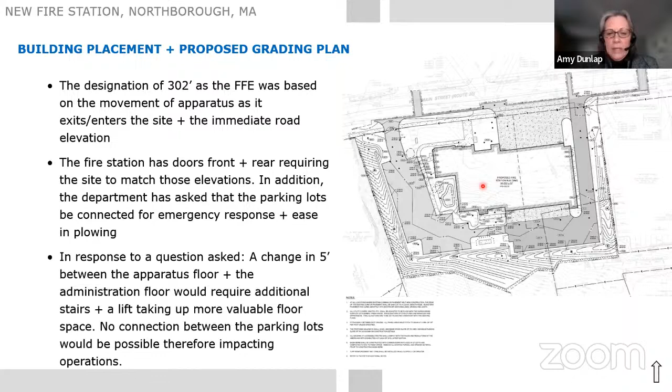In your packet that we've submitted, we have the proposed drainage plan. I'm not going to present that at this time—the civil engineers are on the call, and if you have questions, they can address that during the question and answer period. Similarly, we've got an updated utility plan in the package.

There was a question about what the bollards would look like around the transformer and the generator. These are dictated by the utility company. We have a typical bollard detail that we're showing here to address those questions, but the spacing, height, and size of them are all dictated by the utility companies.

We have an updated landscape plan. Ray Dunitz, our landscape architect, is on the call and can talk about this during the question and answer. We've got a plant list in the package. We have an additional bike rack added to the drawings, some benches as you enter the site off the street, and a site sign located on the site, which is an LED sign—I'll show details of that in a minute. You can also see all the plantings that have been developed around the site.

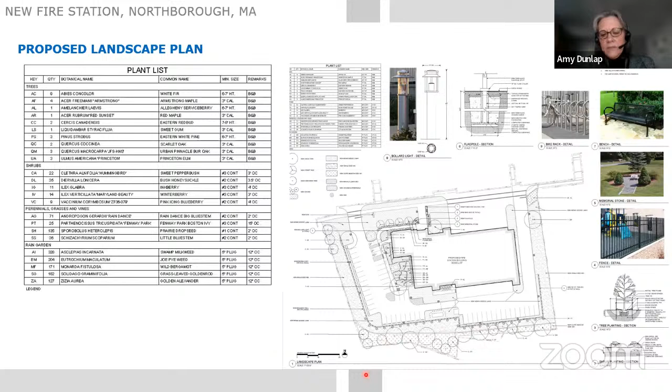In the package, you also see we have a photometric plan. The lighting for the site is a combination of pole lights around the parking areas and driveways. We have some wall sconces mounted on the building between the apparatus bay doors and at pedestrian entries into the building. We also have some bollards in the walkways entering the building.

We have bollards lighting the walkway into the building from the public parking area and from the street. The photometrics show that all the light is contained within the property line this time, and the light fixture cuts are shown on this drawing.

We selected a pole light fixture that was sympathetic with some of the fixtures featured in the design review guidelines, and similarly a wall sconce sympathetic with that pole fixture, as well as a bollard in the same style.

When we last met with you, there were some questions about the design of the retaining wall around the site and a request for us to look at alternate, creative solutions. We did do that—we presented five or six different options to the committee for what we could do with that retaining wall. We narrowed it down to a few options to continue our design work and get some pricing. The design in the original submittal was this straight wall.

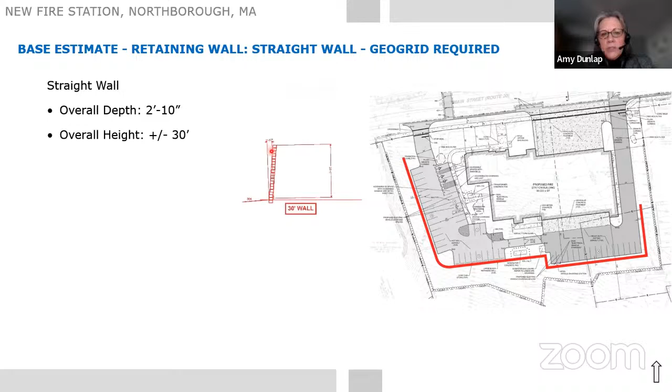We call it a straight wall, but in reality, each of the blocks is set back a little bit as it increases in height. So the overall height of the wall at the high point in this corner is about 30 feet, but the wall itself actually steps back about 2'10". You can see a section of the wall here as those blocks step back.

So one of the options we looked at was this combination of straight walls on the east and west, and then a batter wall in the south wall of the site. In that case, the batter wall, each of those blocks steps back a little bit further as it increases in height. So when you get to that 30-foot height difference in this corner of the building, the wall itself is about 17 foot 2.5 inches deep.

You can see that's this pink shaded area on the plans here. That's the wall as it steps back, so it takes up a little more area on the site itself.

We did cut some sections through to give you an idea of what that would look like. This top section here is taken through the public parking lot at the highest point of the site. So you can see the scale of that wall in comparison to a person and a car, but you also see that the wall steps back considerably as you get up to the top.

This section here is taken at the low point of the wall, so you see that the wall drops down considerably from one side of the site to the other. This section is taken right through the middle of the building. This section is taken across the building, looking back at the wall, and you can see the difference in height from the high point to the low point.

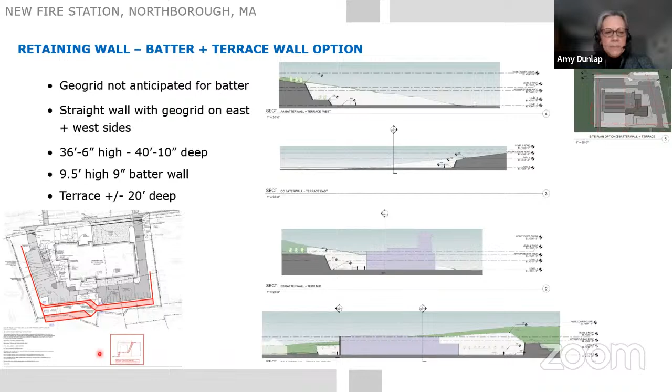And then we also looked at having 2 terraces moving back, again with straight walls on the east and west side, but 2 terraces. Because these terraces continue to step back on the site, this allowed us to create direct connections with the grade from the upper area.

So maintenance would be able to be performed from grade from the upper portion of the hill without having to access these terraces with the ladder. This scheme right here consists of 3 12-foot high terrace walls, and each terrace is about 18 feet deep.

So the overall height, when you get to this corner, you're getting back further into the site where the grades are increasing even more. So the overall height at this point is about 36 feet high, and the depth of the entire system is about 45 feet, 10 inches. So you're really getting farther and farther back into the site.

When you look at the sections here, you can see those planting beds and the relationship to a person and to a car. This is cutting through the building right here where the planting bed would be at its deepest. You can see that right there, and then what it looks like in elevation.

We did price out the straight wall option, the batter wall option, and the terrace wall option. After reviewing those costs with the committee, they decided to proceed with the straight wall option, as this option added substantial cost to the project.

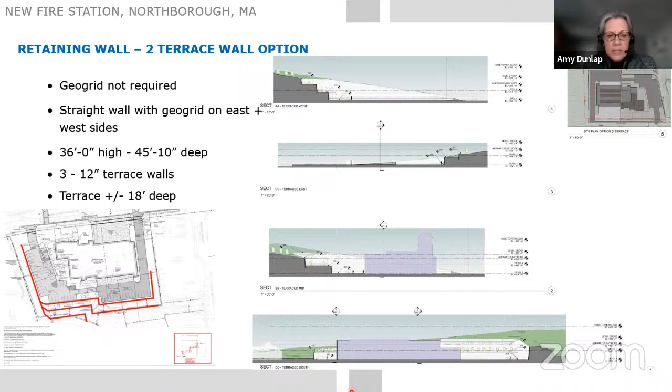There's a training and EOC room, which would also be made available to the public, and toilets located there. Those are the public zones of the building.

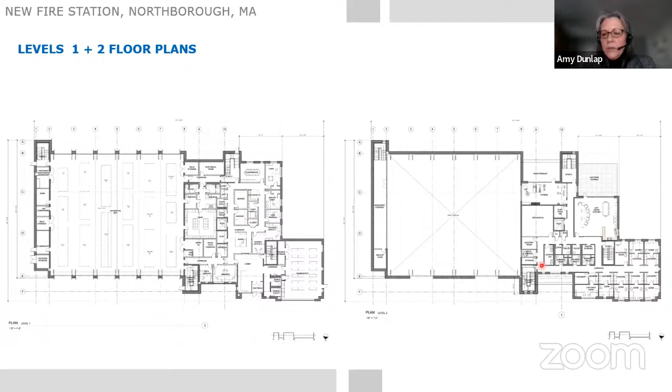Beyond there, there's the fire department administration spaces on the first floor, the fire department operation spaces, the apparatus bays, and all the apparatus support spaces located off of them. There's the hose and training tower located right here off of the apparatus bays. And then up on the upper floor are the living quarters for the fire department.

The rest of the facade has not changed much since we last saw you. We've been working with masonry reps to come up with some options for the masonry. We've had a number of meetings with them to look at different products, and we haven't found the right product just yet to present to the committee, but that is in process. We're hoping to wrap that up soon so that we can present material options to the building committee, and then bring their selections to you.

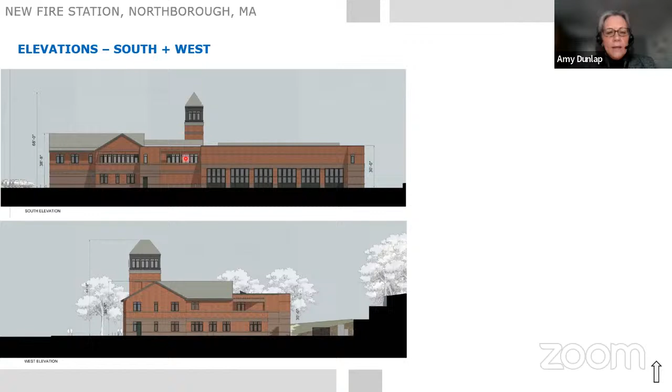When we last met with the design review committee, there was a comment about the roof decks off the day room and off the fitness room, and whether they would be really utilized by the fire department because of the southern exposure and they might be too sunny. We did take that into consideration, and we are showing some screening trellises or pergolas rather over the roof decks to provide some shade for the firefighters out on those decks.

These are the updated views from the street looking from the northwest and from the northeast. You can see that site sign that has been incorporated into the design, which I will show in just a moment. And then these are from the parking lot area, and you can see those pergolas over the roof decks.

We do need to get some zoning relief for a couple of things. The front yard setback is 20 feet required. Our forward-most wall plane is 39 feet, so we'll be looking for zoning relief for that. We're also going to be looking for some zoning relief for the signs, which are limited to 32 square feet.

We have this freestanding site sign, which will have an LED message board, as well as the address and Northborough Fire Department up above it. The sign support base was designed to be sympathetic to the building architecture. It's a masonry base, and we plan on incorporating some of the banding and alternate masonry materials that you see on the building. We have two piers on either side supporting the sign up above, and then a recessed base underneath that supporting the LED sign in between.

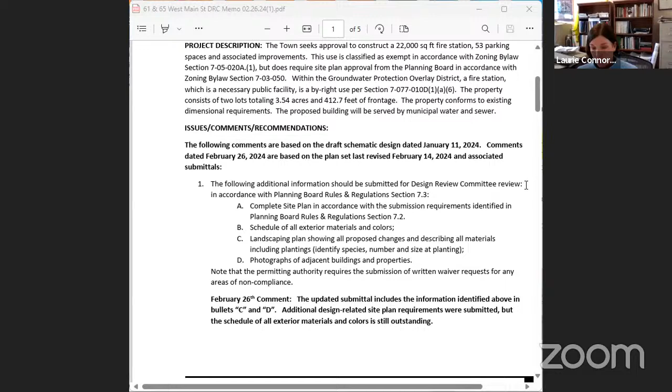Of course, the site plan that is submitted to the planning board needs to depict the underground utilities. So if you could add that. Let's see if there's anything else.

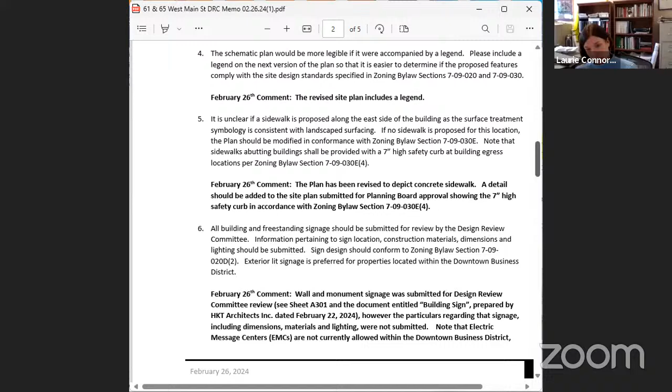What is your planned approach having to do with the street trees? Are you planning on asking for a waiver from the 17 street trees, or are you going to be able to accommodate some additional trees in your design? Ray, can you address that?

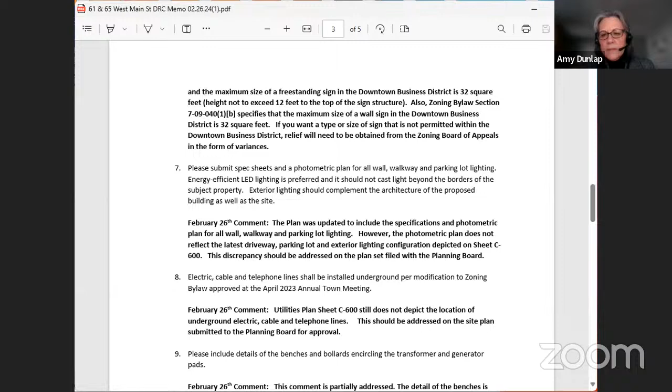I sort of can and sort of can't, because we need the sight lines for the trucks. We put in as many as we can to keep the sight lines clear, and also for cars entering the parking lot. If we can double them up, we'd have to work with HKT on how to approach adding additional trees without blocking views. Does that make sense?

As a compromise position, it did look to me like there were a couple of locations on the site itself, maybe behind the building, over by where the parking is, where you may be able to accommodate some additional trees. Yeah, we can add more trees. It's just the street tree definition. So in your waiver request letter, you could point out that in exchange for having fewer street trees than the requirements state, you are providing those trees in alternative locations. They might like that.

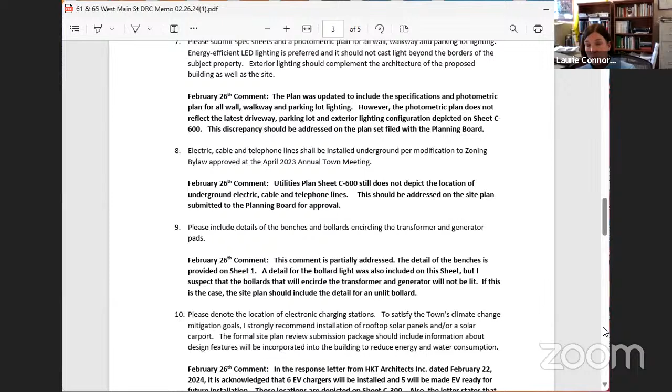Of course, adding the ADA compliant ramp. So it looks to me like you are going to be removing the existing sidewalk on Route 20, and shifting the location of the sidewalk and building new. Is that correct?

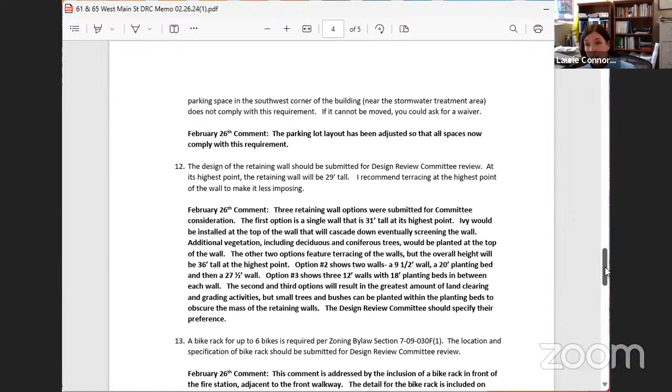Yes, that's correct. We wanted to provide that landscape buffer, the grassed area between the right of way and the walkway. That's great, because the sidewalk is broken in places, so I'm happy to see that you're doing that. Just make sure that you add the ADA compliant ramps and the detectable warning plates where your driveway locations are.

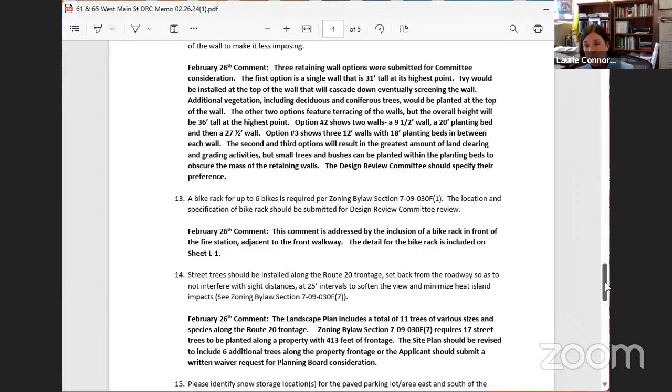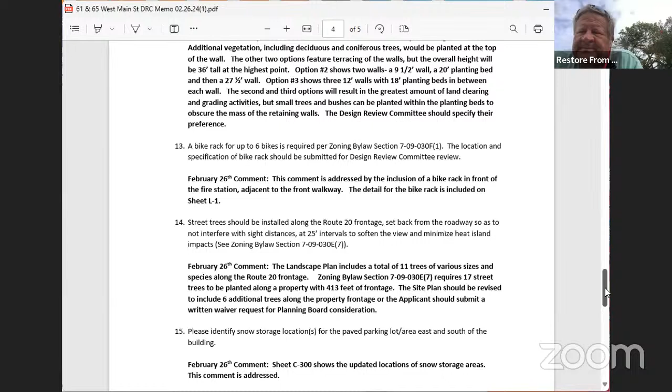If you're doing that, are they going to reconnect the sidewalks to the existing sidewalks, or are they going to be floating in the middle of nowhere? We'll be connecting them back in. That's how it's shown on our plans right now. I know that was one of your other comments, Laurie. We're showing connection to the Hillside Grill walkway now, and we will be connecting into the adjacent bank walkway as well.

Okay, that's great. Excuse me, can I stop a second on that? The adjacent Hillside Grill goes up and back, it's not along the street. Correct. So how will you connect to that?

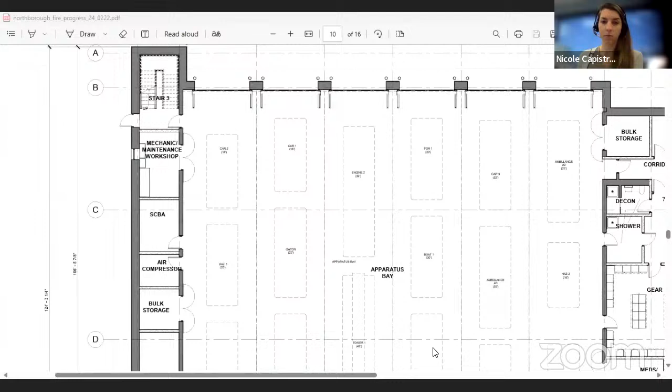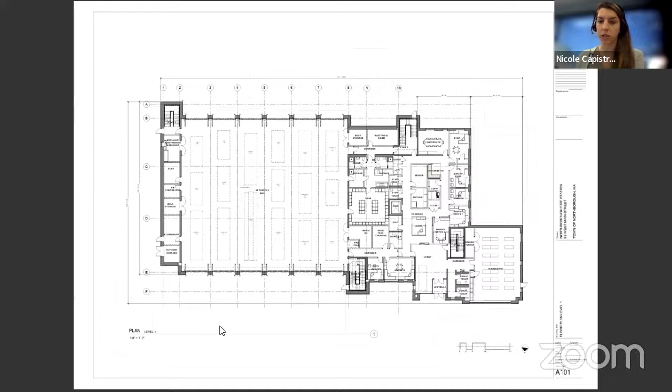So our walkway is also back away from the street to provide that landscape buffer. So we're pretty well aligned. We will need to adjust, it won't be a straight line connection from our sidewalk to their sidewalk. We'll connect in, we'll be able to grade to connect into their grade on their site. We've already reviewed that. Is that somewhere we can see?

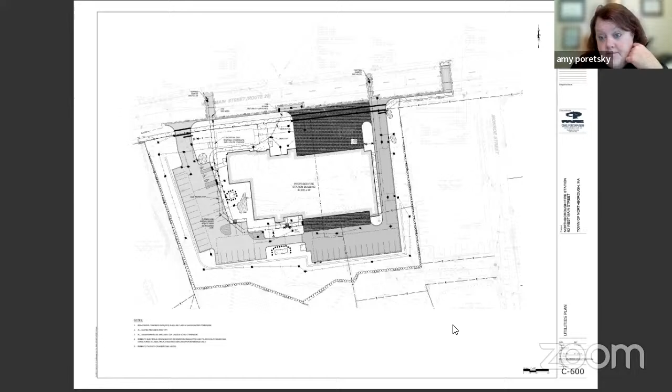Can I ask one comment? Nicole, you did insert a new civil plan, correct? And that is in our presentation from today. So if you let Amy reshare, Nicole updated that plan, if that's okay with everyone. Sure, thank you, Janet. That does show to Lori the accessible ramps and detectable warning panels that we've already added based on your comment.

Great. So theirs is much higher. How does it get connected so that somebody can be ADA compliant and go up to theirs and then come down to their driveway? Yep, so we have landscape area on either side between the right-of-way and where we're connecting in. And also the grades on our side of the site where we're connecting in is landscape. So we'll be able to grade to their same grade, and along that stretch of walk, we can grade up to 5% max to still be ADA compliant.

But you don't have an elevation showing us that. You just have this piece, is that correct? The difficulty is that sidewalk has always been a problem because nobody seemed to ask why it wasn't on street level and why it wasn't connected to the next piece of property. So it would be better to understand how it's actually going to look, not just from the bird's eye view, but from the street view.

Right, so now it's a pretty high rise, it goes back to their building. It seems that building in that location is a little disjointed from the rest of the road. And you're saying 5% was acceptable, but visually 5% is hard to understand what it is. When you have people walking with a walker or a wheelchair, I can't visualize in my head how it's going to look. So I'd like to be able to see that in an elevation.

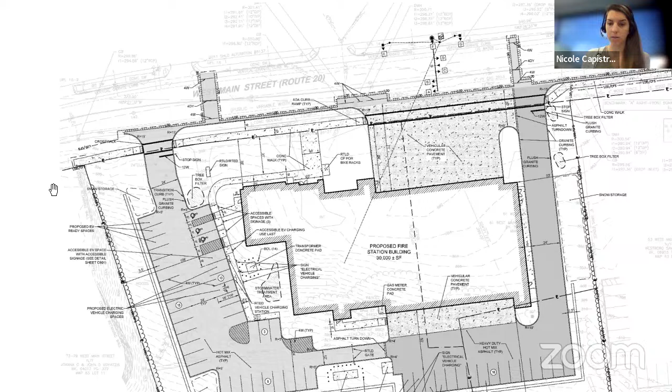All right, I have another question, but that's a wall question. Go ahead. Thank you. Okay, thanks — Lori, did that answer your question? Yes, I'm all set.

I just had a question because I know the design team is going for variances tomorrow. They're going to send out an application — I had sent Bob an email last night, I know it was late. I just wanted to see, since Bob mentioned the tower is an uninhabitable area, whether they still need to go for the height variance. I don't want them to fail to apply for something and then have to add it to the list once they get to the ZBA.

The tower does not meet the definition of habitable space, according to the definitions listed in Chapter 780 CMR, the state building code — that's directly where the definition came from. The zoning code in town doesn't have a definition of habitable space, so it's not up to opinion. I went to the next best source I could find, which is the building code, and that's where I got the interpretation.

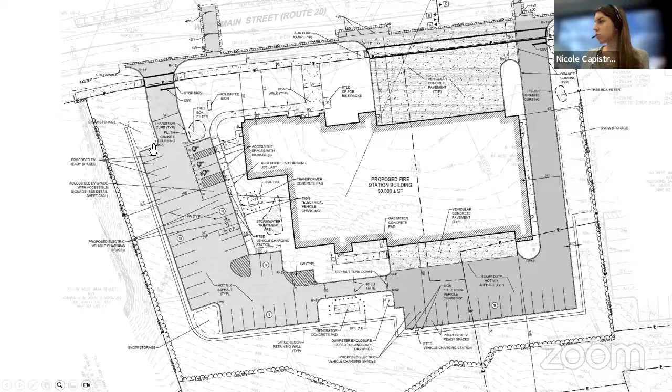The other sizes are, let's see here, about 20 feet. And it's kind of a circle there in the back corner of the site, the southwest. And I would say something similar to the front without getting into specifics right now.

We should also add that Chief Parenti has been talking to the DPW about how they handle snow. Sure, I'd be happy to. So I spoke at length with Scott Charpentier, and he recommended using a moved gate. That small pathway we created, we could center a gate there, and use that whole area for snow storage.

And if we needed it, DPW could be over there with a loader and have the area cleared out in 15 minutes, not an issue. Like where we are right now, when snow backs up, they come over and clean it out for us, so that would be the same process. He thought there was sufficient room for snow storage and our ability to remove it. All right, so you're on board with Scott and he's fine. Yep, that's all I needed to know.

Can I ask a question about the wall and snow? With the wall being 30 feet high and the chances of sun reaching the pavement, how is that going to react to melting, even if you remove some of the higher piles? That's pretty much the melting question, because that's why you have snow piles.

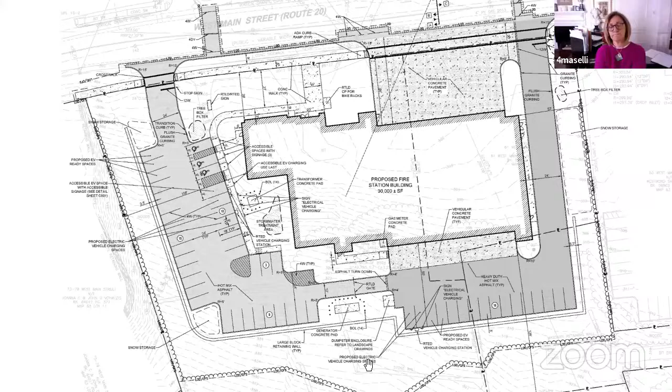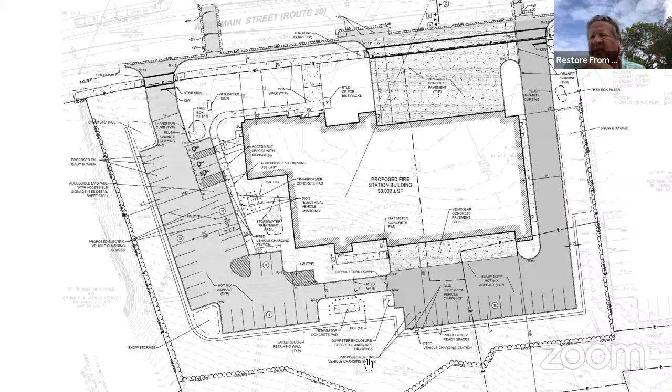Okay. What do you think, Dave? Do you see the wall as an issue back there with the snow removal and the sun, or in your opinion, as long as there's sufficient drainage there, he'll be fine. If it does back up, he can come in with the loaders and truck it right out. As long as Scott's on board, he knows what to do and he can get it out of there. You just have to move the cars, truck it right out of there, and move it over to the barn and let it melt over there. That's what I would do.

While this drawing was up, I had a question. The transformer is on the west side of the building. Had there been any thought to put it on the back with the generator? It looks like the electrical room in the building is in the back, so they're all run into the building under the same utilities, or is there a reason why the transformer is over on that side of the building?

We had a lot of conversations with the electrical engineer and with PAR as well about the best locations for these. The closer you get a transformer to the street, it's actually less cost, because the most expensive run is the primary run from the street into the transformer. So if you move the transformer back into the site, you're really increasing the cost for that primary run.

The other issue is that putting the transformer and the generator near one another, there are certain distances that are dictated for safety reasons, and without impacting any of the parking spaces here, we'd likely have to put a blast wall between the two of them in order to meet the requirements. That has to be a rated wall, and that would also increase cost and is not ideal. So this was the best location for the operations of the building and for taking cost into consideration.

Okay, and it won't really be seen from the street either. It's pretty far back and it's kind of behind the training room. It's partially obscured, and with the landscaping, it will be obscured as well.

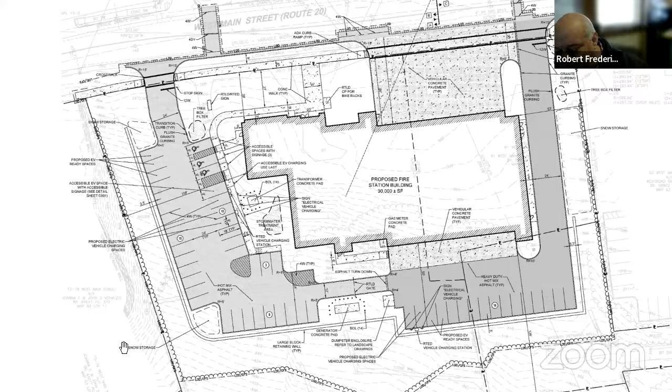Yeah, if I may - Walmart was one of the first ones in the area to put these charging stations in. And of all the charging stations I've seen, both in Northborough and around the area, Walmart is the only place that has that type of electronic backup, which leads me to believe they probably didn't have sufficient electronics on the site to do it without those transformers. And that was, I want to say, 6 years ago. So the technology has definitely changed - lighter, smaller, more efficient.

So I don't foresee the need for any of that sort of big fenced in area. Like I said, between the change in technology over time, and if you look at all the other installations that have gone in that don't have that big conglomerate of boxes, it leads me to believe that Walmart probably didn't have either the correct type of power or correctly conditioned power or enough power on its main lines. They had to put those capacitors in.

Okay, I don't have an electronic car, so I didn't know which ones had to do that and which ones didn't. Yeah. Okay, I have a question too.

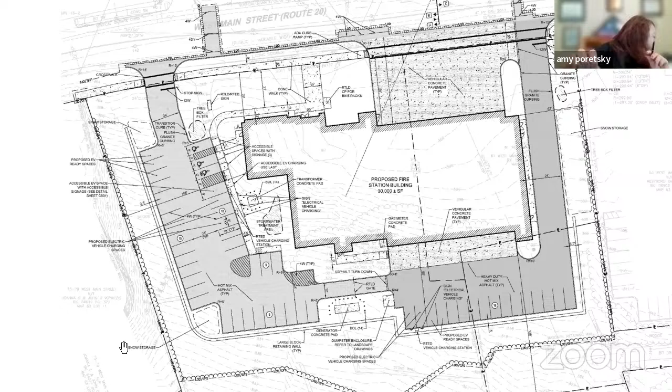While this is up - there's a zigzag line in the back, which is the limit of clearing. Was there a reason why that line was picked? And I'm only thinking because we're talking the wall, and I was wondering about a slope versus a wall, and was that looked into?

Yep, so that limit of clearing is set based on our grading that we looked at with the straight wall option. That limit will be updated as required for what we need to swale water around the wall with the updated wall option. So that's what dictates that wall line, or that limit of clearing line - it's the grading that's required to make the wall happen.

That does include sloping behind the wall and sloping away from the wall to create a swale to direct water around the wall. So in terms of what you were referring to - just straight sloping - you would have to really chase the slope up the hill, and there's already steep slopes up the hill. You don't have the space within the limits that we're showing to be able to just slope down without that wall. That 30-foot difference is a large difference when it comes to just sloping down.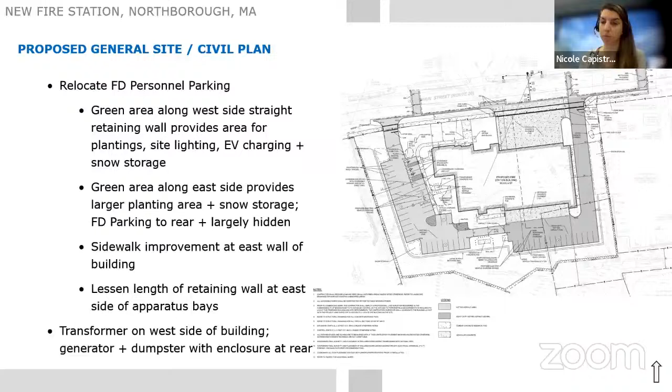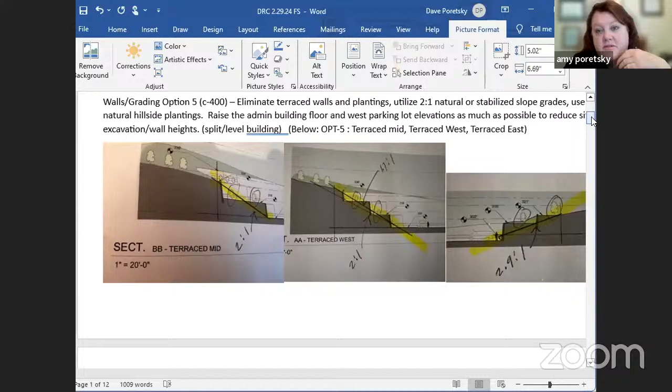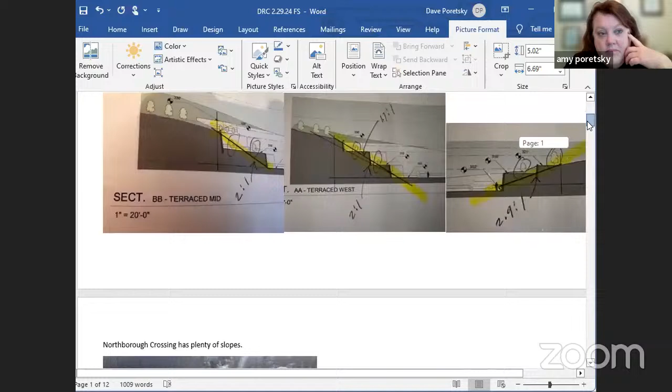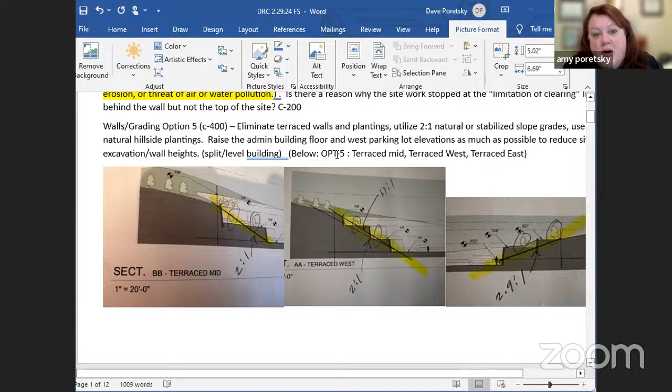So, one thing I was doing when I was thinking about the wall, and I'm not the engineer, and I do appreciate your description, but there are some places in our town that have super steep slopes, and you're saying there's just not the room to slope it. Like, this is a pretty steep slope. I guess my idea coming today was to ask if there was a way to utilize natural or stabilized slope grades versus the wall. And one thing I also wanted to discuss was raising the administration building and west parking lot elevation as much as possible, because the higher up it goes, the lower the wall goes. But

You're saying it can't be done. Nicole, can you talk about the grading challenges? Here's an example two doors down. This building is two doors down, and they went up in elevation, and then they have a riprap slope back there.

If I may, at 89 West Main Street, I recommend you not use that as an example, because that back banking was incorrectly installed. It's one of the failures in the site plan review that they are currently required to fix, so I would just caution about using that as an example, because it has not been installed according to the approved plans.

Will they have to put a wall in? I'm just wondering—I don't like the riprap, but there are a lot of other slopes in town that are pretty steep, and I was wondering if it was something that could be done, like behind the fire station. So the steep slope that I was referring to, that we reviewed, is one where you'd have to chase it back. Three-to-one is typically what we use for just a grass slope before you get into the need for riprap. Two-to-one would be with riprap.

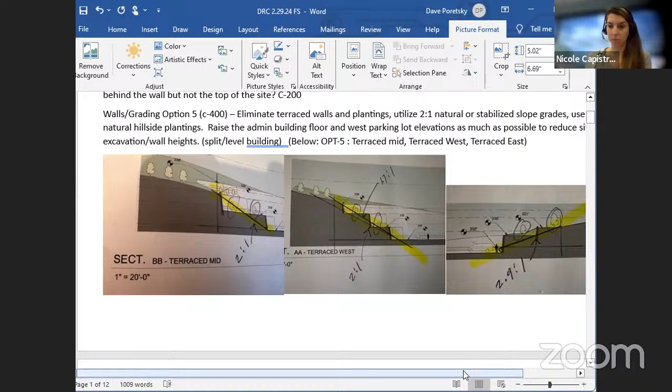I think there's a couple of things to note in terms of how we've reviewed this grading. One is that the finished floor of the building is the finished floor all around, so that extends to the back of the apron as well, allowing vehicles to back in at the back of the building. That sets the 302 elevation, close to the roadway elevation around that portion. HKT spoke to why the finished floor is the same across the whole site—you would need an elevator if it was at a different elevation, which also plays into the use of the building.

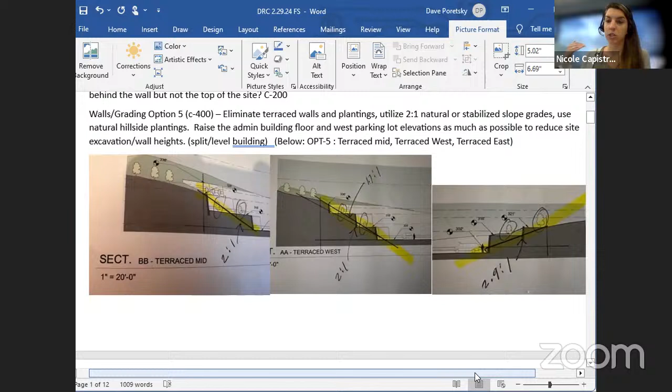In terms of grading, that's what partially set it. Also, if we're going to slope a hill, we need to make sure we have separation and the ability to swale—we don't want to direct a slope directly to the area used for vehicles, especially for an emergency operations building like this. So that's a couple of reasons why we can't slope back given the space, and you end up chasing the slope back because of the steep slope that already exists.

I just didn't know if it stopped because of the limit of grading—there's a line, a limit of grading—so I didn't know if they had stopped it for a reason, and that's why we couldn't do the slope. But if the limit of grading moved, then maybe you could do the slope. I did imagine a small wall at the bottom to catch the swale and divert the water off, but I just know the wall is—

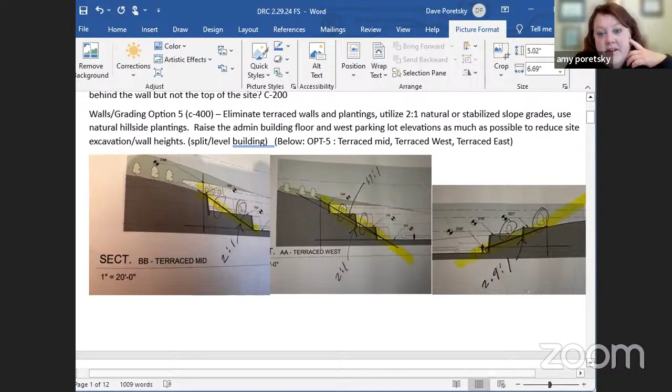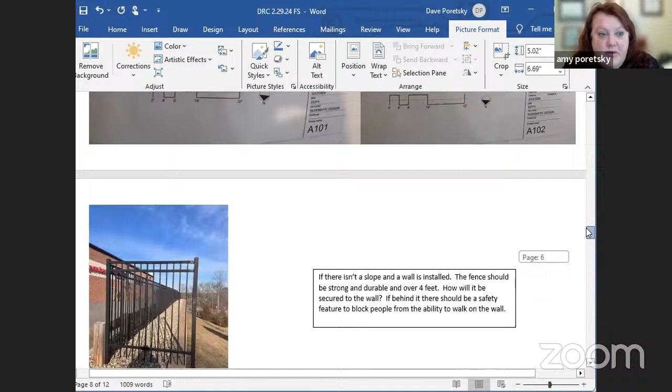And thinking about the wall, you can see the fencing up here. If they do go forward with the wall, I would hope there would be fencing higher than 42, 44 inches. Pool fences have to be at least 4 feet. This fence right here at Northborough Crossing was taller than me. I don't know how tall it was, but I'm about 5'4", and it was higher than I was. And they have this safety feature to block people from walking on the wall, unless you're going to put the fence right on top of the wall. I'm sure you're not, though. That would be tricky, right?

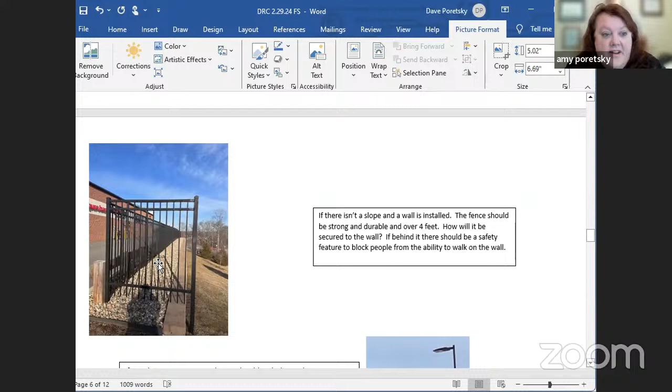We are showing fencing at the top of the wall for safety, and we'll look at the detail of how that gets set with the wall itself during construction, but we haven't designed that detail just yet. So you are going to set it right on top of the wall? No, but I'm saying we have to look at the construction detail of how the wall is built and how that fencing is set. We haven't drawn that detail yet to figure it out. Okay, it'd be great if it's actually not set on the wall, to have some safety features.

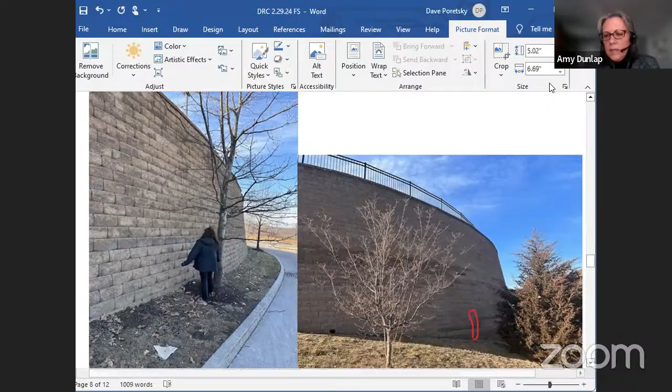Can I ask a question more about the wall again? Your connection between Hillside Grill and your property, there's a huge drop off on the hillside side. How are you going to connect the walls? Is it going to be a little grassy area that's 10 feet between them, or what's going to happen with that connection? You'll need something of it, with the landscape. Nicole, do you want to talk a little bit about the clearing that needs to happen there? Yep, so we will need to meet the grades that exist at the property line, matching the grades at that property. So where those grades are, in that landscape island, there will be landscape between the two walls that will exist on the fire station site and on the Hillside Grill side. So how wide is that?

Let's see, I can get a dimension for you here. It's approximately 30 feet between the two faces of the walls.

Is there any problem with the hillside wall collapsing, or not being built with the expectation that an area would be taken away on the other side? Is their wall, Bob would probably know this maybe, going to be strong enough to hold just that 30-foot span with the water that does come off the hill? There's only so much land that can absorb it. I hope you have some sort of piping into the ground for the excess water from the hill that you're now carving into. But I think the adjacent project is very important because that's already cut into that hill quite a bit, and now you're coming around with a further cut. So it's historically a wet area, and I think you're taking away as much natural defense as was there before.

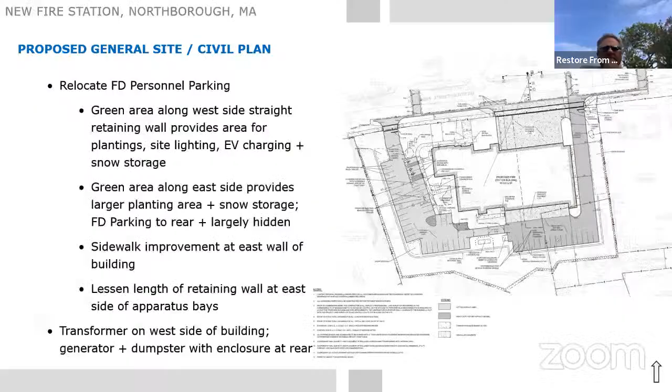Okay, and do you have a drawing of what this is going to look like? We have the grading on the top. Yeah, if I can share my screen again. And do you have this in an elevation? So this is the plan of the drainage.

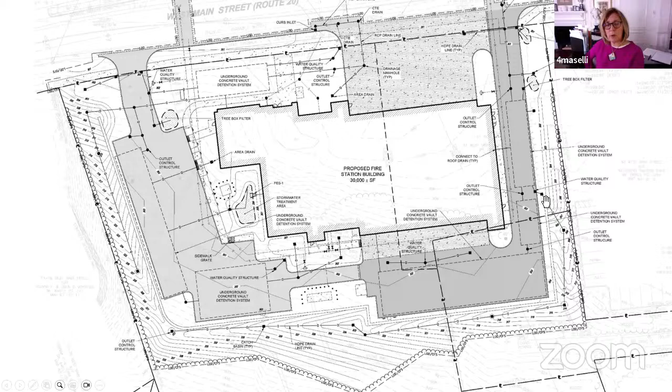Yeah, so we're showing a swale running down towards West Main Street with catch basins along the way to collect some of it. So okay, so it's going to come all the way around and out? Like there's piping that will take it to that point, and then collect out onto West Main Street, or will it go into catch basins? It'll go into catch basins and then into the underground detention systems we're proposing. Okay, so there's an underground detention system here, and you can see the drainage line going underground into the system.

I was wondering if the apparatus bay floor drains into it too. Are there going to be any floor drains? There will be floor drains. The floor drains go into an oil water separator. Nicole and Jim, you want to talk about where it goes from there? Yeah, so they would go into an oil separator and then into the sewer system.

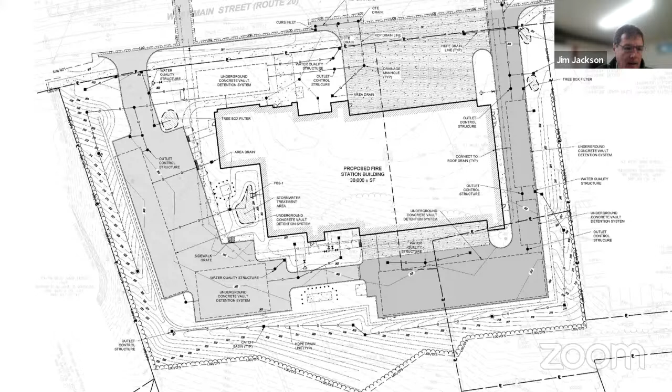Okay. Lori, this is just for the planning board. Will there be a town engineer that also reviews it? Like Fred was the one who would review all of the retention basins and stormwater.

I am going to finalize that with Scott. As you know, we lost the assistant DPW director, so that position is now open. Fred has stepped in to do some additional consulting. Ideally, I would love Fred to do the review. And then this will trigger a land disturbance permit with the Conservation Commission, so Vinnie Vignali, who is also an engineer, will be doing the review of the stormwater system. Okay, that's great. Now that Fred's gone, it makes it tricky.

Okay, Lisa, did you have any more questions on that, or anybody else on the board? I'm going to wait for some more questions at the end. I think I interrupted Dave with his landscaping questions. Sorry, Dave, I was just going one at a time, so go ahead. Are you done, or do you want to talk more? I was just on snow and some minor things as I keep going. You can keep going, go ahead, shoot.

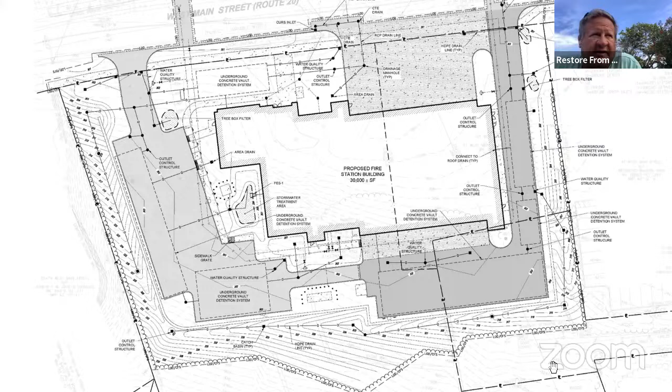35 minutes ago, so I really can't comment on the landscaping too much because I only saw it for about 2 or 3 minutes. It was up on the screen, so I went to look at it, but I think that would definitely help as far as seeing it. But myself, I need to take a better look at it. That's my 2 cents on it.

Thanks, Lori. I see your hand is raised.

Yeah, I just wanted to point out, you can see on this drawing that the retaining wall for the Hillside Grill does not abut the property line. So there's just going to be a wooded elevation. Of course they're going to be grading, as shown on this plan, up to the property line. But on the Hillside Grill side, there is forested area.

So it's just going to be woods on their side in between the retaining wall and the property line. The woods only come up to the top. There's grassy area from the side of the building. From the street side, as it comes up, there's a good amount of grass between the building and the right of way. So that's just going to be landscaped area, I guess is my point. You're going to see that the walls are never going to meet.

There's going to be landscaped area in between the walls, and maybe you can point out what the distance is between this retaining wall and the property line. I can't see it on this plan. Nicole, can you help me with distances here?

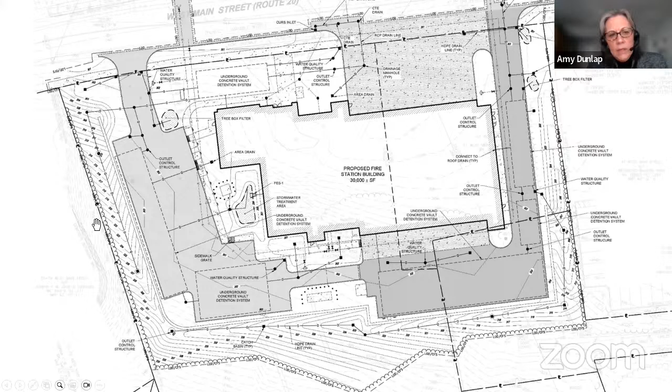So as Laurie says, there's a masonry retaining wall on the Hillside Grill property right here, and then there's a stretch where there's no retaining wall, and then the concrete block retaining wall continues back here. But there is a distance from their wall to the property line, and then from the property line to the fire station wall. Nicole, I don't know if you know what those distances are.

Yeah, so from the face of their wall, where they're at where their driveway portion is, that's 16 feet to our property line. To the approximate top of the wall, where we get to about, it looks like 10 feet from the property line, where those grades are right at the back of those extreme grades to the property line is about 10 feet.

Could you also explain what the distance is from the fire station property line to the retaining wall on the fire station property? What's that distance? Yep, so to the face of the wall to the property line, it's about 25 feet. So there's going to be about 35 feet of landscaped area in between the two walls at the narrowest point.

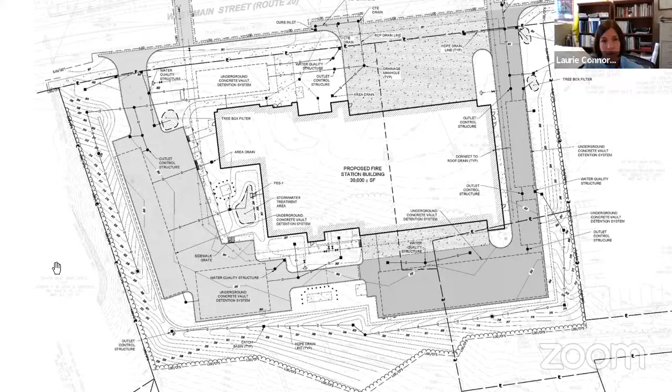So again, an elevation would be much easier to understand than just this one tile. I'm just making that recommendation. I think it's going to be very important that people get to understand what they're looking at. But that's your choice.

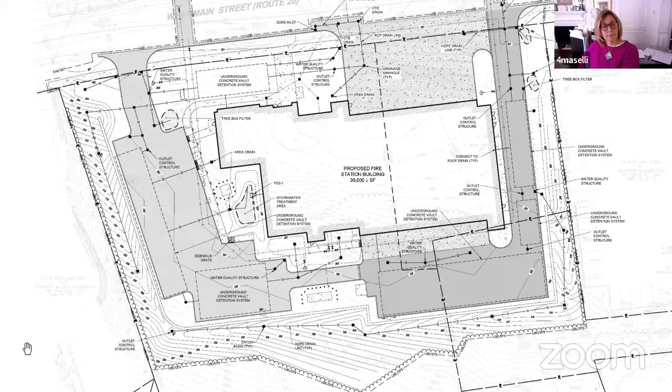Okay, I had a question about the pergolas on the back. Is there one or two? Because I noticed there are two roof terraces. Is there one? There are two. Okay, all right.

Going back to our Southborough tour, they just had a picnic table with an umbrella, and that might be a thing when we're not talking cost, but in the future. I know with prevailing wages, the pergola area on the town common, which is pretty big, was $90,000. So it might be something they want to take into account when looking at costs.

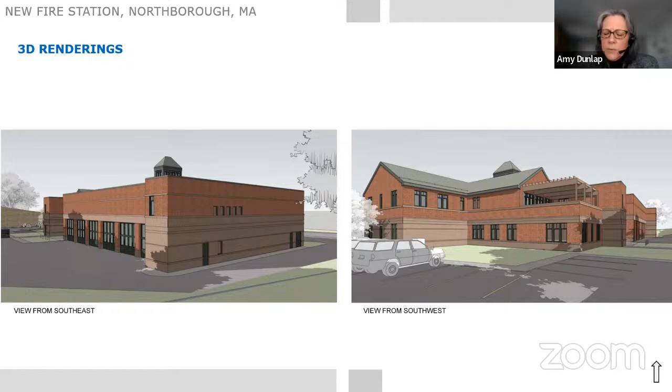Also, when you're on that roof terrace, is there a wall when you overlook the parking lot? Like, is there a safety rail, or does the wall come up to your waist or chest? Yes, so the parapets would be built to the height required for them to be guardrails, so there would be a 42-inch high guardrail, combination of the parapet and any railing we'd need to make up that height. Oh, okay, all right.

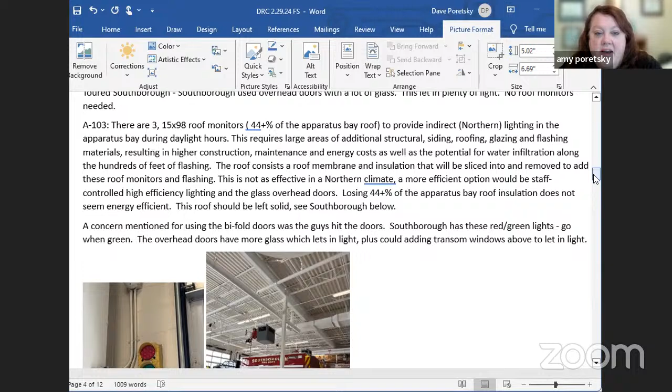Okay, I just wanted to share this about the roof monitors. When we went to Southborough, they had no skylights, no roof monitors, they have LED lighting, and it was super light in there. So a concern I had with the roof monitors is there are three 15 by 98 feet roof monitors, and they cut into the roof membrane, which is insulation, and I'm concerned with the amount of buildings we have leaking right now, that in the fire station we don't want to add any more maintenance, any more cost.

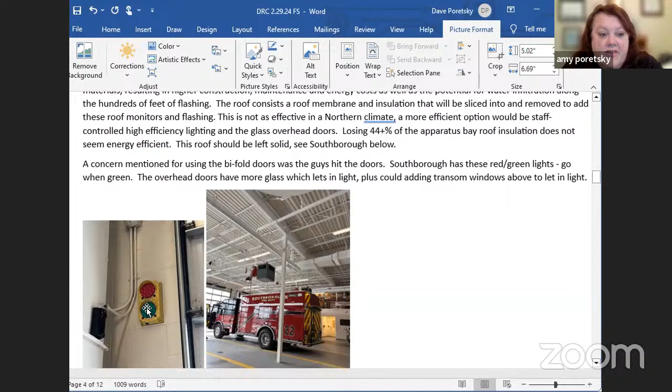They use the overhead doors with a lot of glass. And I know a concern was that the guys might hit the doors on the way out. They had this red and green light system where, when a call comes in, the doors start opening, the guys put on their gear, and the light turns green before they pull out, so they're not hitting the doors. But this is just something I wanted to throw out there because there is a concern with the maintenance and the cost, and energy costs too when you're cutting into the insulation of the roof.

And this is a northern climate, so the roof monitors, I don't know, they help during the day, but I guess when the fire station committee goes back and looks at them, is it worth the risk of leaking? And also, are they needed with the lighting? It was just something that really stood out when we walked through. I looked up to see what system they had because it was super bright in there, and they had no skylights and no roof monitors.

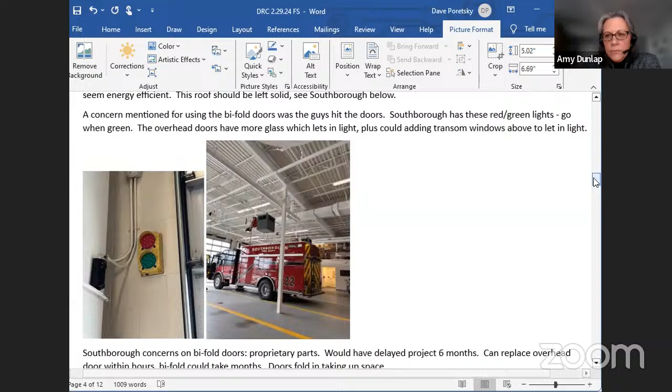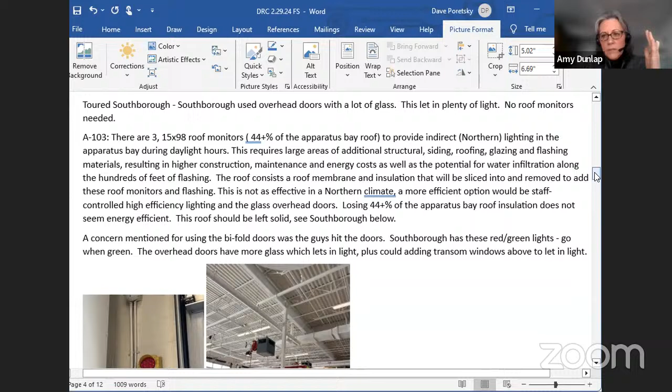I have not been to Southborough, I can't speak to that project design, but I want to clarify that we're not cutting into the roof insulation. These aren't skylights that would interrupt the roof plane—they're actually roof monitors, which is a little different. The glazing is on a vertical plane like a wall, so the roof membrane meets the monitor, and the vertical surfaces of the monitors are built like walls, so there's insulation in those just like in any wall. The sloped portion of the roof monitor is built like a roof, so there's insulation just like any roof portion of the building. The vertical glazing part is like any window and is built to meet energy code requirements for fenestration, so it doesn't affect the overall performance or insulation plane of the building. Everything in this building has to be built to meet the energy code, and we're not cutting back on insulation in order to put an opening in there for light.

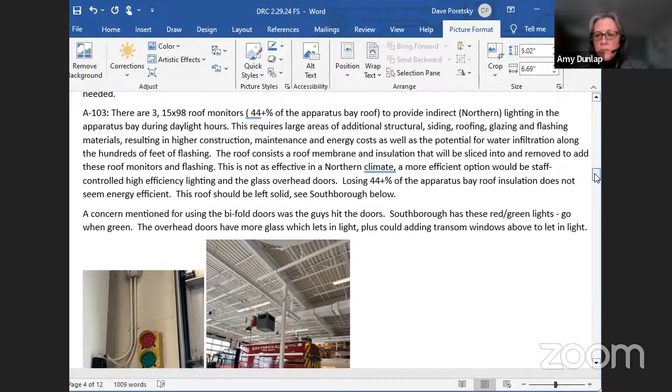I don't know Southborough, I haven't been there, I can't speak to that, but I do know we've done these roof monitors in other buildings. We put them in Ashland, and they really helped bring light deep into the building. You might get some light from the doors at the perimeter, but you don't get the same light levels deep into the building, so those roof monitors definitely help with that. I think we're trying to build a building that is healthy for the fire department personnel as well, and access to light and views helps with occupant health—the roof monitors contribute to that.

Is there flashing around them? Are they cut into the roof? Yep, there definitely is flashing, absolutely. That's where I just felt the Southborough one looked deep—I had to keep comparing how deep Southborough was to Northborough, but it was plenty light. Again, I haven't been to Southborough, it's not one of our projects, I don't know the plan, I don't know the orientation.

I don't know any of that, sure, speak to it. Sure, thank you.

The one thing I have to say about any flashing is that's where so much of your leaks happen. Hopefully the contractor does a good job and the flashing is done correctly, but we've had so many leak problems in these buildings, and I know people that have had them. Anytime there's that connection, years later you will have water issues.

Construction oversight is really important, which is why you have an owner's project manager on the team. The design team oversees construction, we visit the site and observe to make sure the contract documents are being followed, and the owner's project manager has someone on site full time to do the same. At the end of construction, the roof manufacturer is typically required to do a walk of the roof to make sure the installation meets all their requirements before they issue a roof warranty. So there's a lot of oversight on a public construction site when it comes to envelope construction issues.

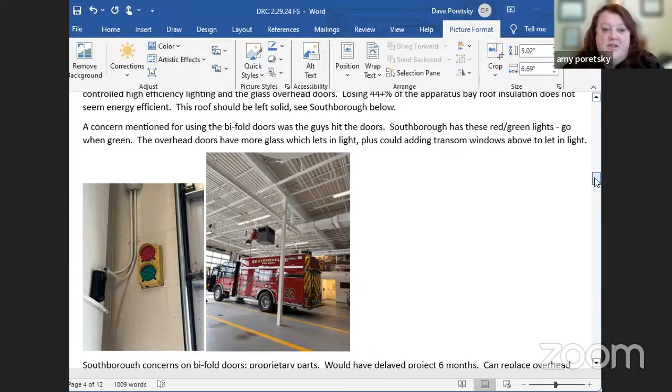Just to talk about any kind of lighting, skylights, or monitors - that's going to come under the building code requirements, depending upon the size of the apparatus bay, the usage, how much natural light. They may be required under the building code. Keep in mind the new energy code is coming out and it's going to get a whole lot more difficult, so we have to be cognizant of that. Whether or not you like monitors or skylights, or are worried about flashing on the roof, you may have to have it. I'm just putting it out there.

I know this is New England - anytime you have adjoining walls, flashing or whatever - but I think Amy's correct, it's got to be looked at correctly with construction documents, OPMs, and inspections. Yep, I just wanted to throw it out there.

Thank you. I just want to go through - does anybody else have any? I have other questions, I just want to know, I don't want to take up all the floor time. Anyone else on the team or on the design review team have any questions?

Okay, am I gonna have a chance to go through my slides? Sure. You want me to pull those up?

Yeah, pull them up. I think most of them are gonna be pretty quick, but what we're doing is I joined this team to try to come up with a scoring system or a review system where we can go through the design guidelines as they stand and be pretty objective about it instead of subjective. So I'm going through verbatim what the guidelines are and just noting where the project stands.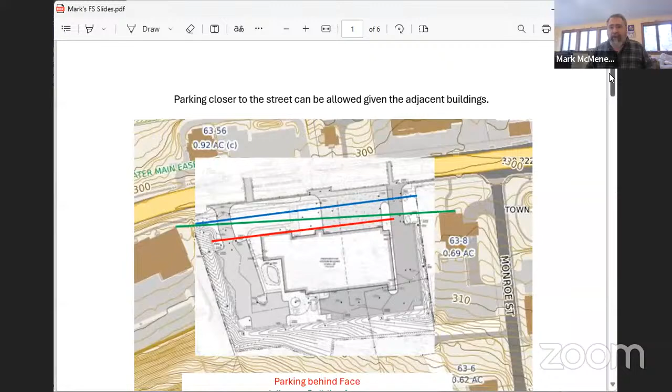I have a couple of open items I wanted to close out. This first slide is quick - reviewing the previous meetings, there was a conversation about moving the parking towards the street since the setback is exceeded. Rather than following the face of the building, move it up towards where the normal setback would be, or a line established by the two abutting buildings. So this slide was prepared for that.

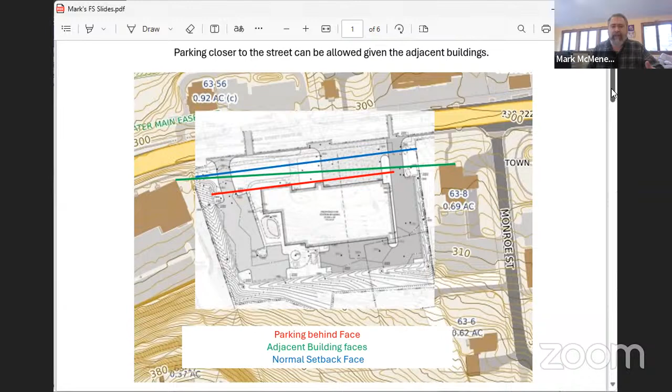And then the next meeting picked up with, rather than having any parking moved or a discussion about that, there was additional parking added in the back, which is fine. But I'm curious - the purpose of moving this parking towards the street was to get rid of those 6 spaces down in the corner of the wall, to try to step out the wall a bit. So was there discussion about that in a meeting that I'd missed?

I guess this is more for the architect team. I spoke directly with, we mentioned, asked about pulling the parking, and Lori Connors and I had a conversation, I think with the committee, about where the parking had gone, and the design guidelines suggest it's the building facade. Lori, you suggested it should not be beyond the facade to me. So if I misinterpreted, please point that out.

Mark, there is a design requirement. It's a design standard in the zoning bylaw that says the parking cannot be in front of the facade of the building. So that's in the zoning bylaw. Right, but that's also something that we're reviewing.

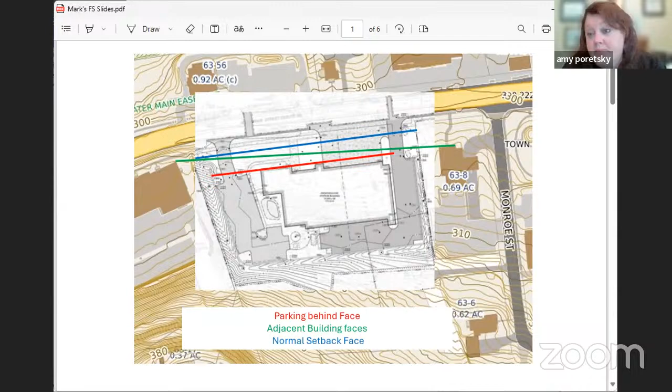Okay, that's fine, I'll just close out that item saying it's not feasible. Well, it's been waived in almost every other building down there. So if it was something that saved the town a couple million dollars, I think the committee would waive that if it saved money. It's been done for almost all the other parking downtown. It would have to be a special permit.

Okay, so it was something that happened outside the meeting. I know at the last meeting, I think it was Mitch, who suggested looking at that, trying to get rid of those back parking spaces on the corner because that really impacts the wall. So I was kind of surprised to see the terraces going back into the wall instead of out to where the previous parking was. But that's okay, that's my misunderstanding.

Okay, that's it. If you want to go to the next slide, Amy.

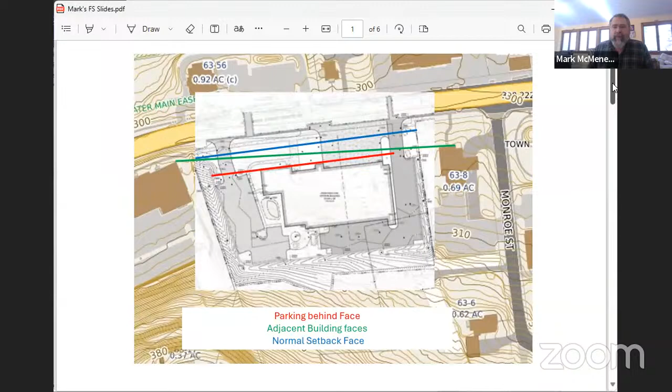All right, now I'm a design engineer and I've got some good experience setting up factories and products. This is just a concern that I have. I know when I made this slide, I didn't have a good set of drawings with the drainage system. I can see you pitching it away from the building to the proper 1 foot per 10 feet or whatever it is, but then you were talking about having heated pads around there.

So I do have a concern that in the event of freezing rain or slush, those drains might become plugged. Where your street is at 300 feet and the building's at 302 feet, it really doesn't have much differential. So if you have a snowbank along the road, or frozen snow on the parking lot itself, especially if it's slushy that turns solid, it could start to trap the melt from the heating apron. So I was a little concerned about where that water is going to flow. But I see you got drains right at the base of it, so hopefully that covers it.

But the main point here is that raising that building by 2 feet, 3 feet, or whatever really does decrease the height of the wall in the back of the building. So it's just something I would have done differently. So maybe you have a good reason for it.

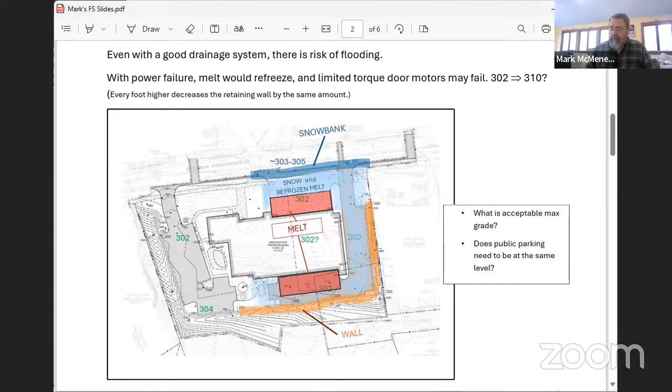Okay, next slide, Amy. Okay, this is about the wall height. I come from an industrial background where if we had a 30-foot wall, OSHA would be all over us about making sure that it's safe.

I guess I've still got concerns. Looking up what the safety heights are, I think a 10-meter wall has almost a 30% fatality rate if somebody were to fall, especially onto hard pavement.

And it's not just accidental falls you have to be concerned about. I know Southborough in their training tower had to put deadbolts on the second floor locks to keep people from potentially hurting themselves on purpose. I do worry about that.

And if we have to go to a larger fence or a curved top fence, with the guard tower and everything, this really gives the building a bad look. I think a 42-inch fence we could make look good. So that was just a concern.

Can I just jump in? I think being around the bend from Assabet Park with kids saying, hey, let's go check out the fire station, I feel it's more of a concern the area it's in. I grew up near downtown. I brought my kids to Assabet Park, and I feel like, let's go look at the shiny new fire trucks. They might come back over the hill and be peeking over the fence.

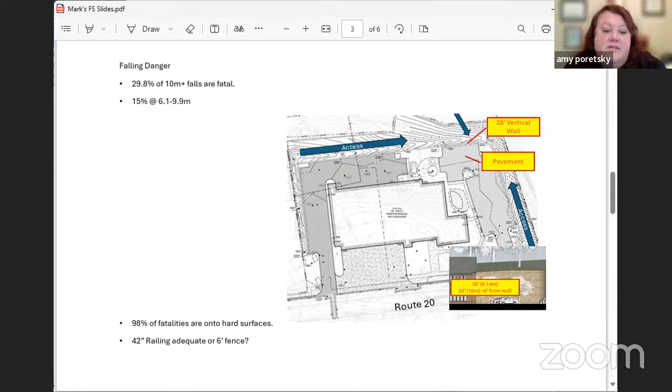I don't know if stepping up the building helps or not. But yeah, I know I had asked for some cost per yard. I guess I don't need that information. We don't need to go into cost at this level.

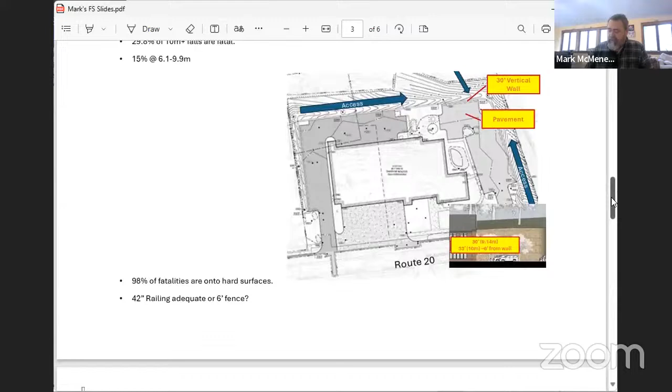I think that's really beyond the scope of what we've been asked to do. We have not looked into the neighboring properties. I said it's beyond the scope here, but I'm just saying if it was done at a different level and we said we can do this, would that help to decrease the height of the wall?

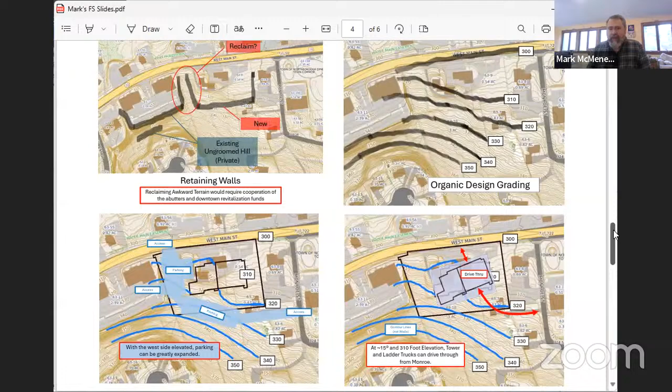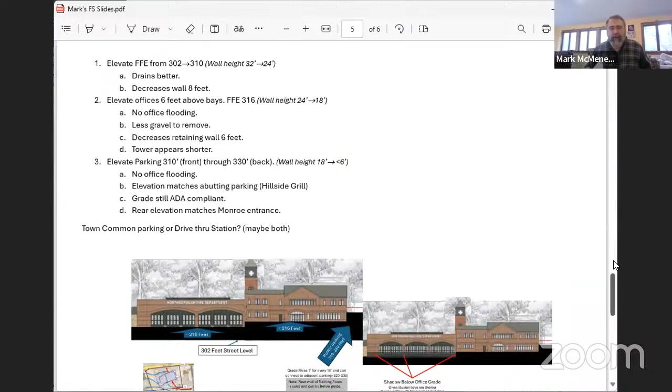Let's see - yeah, next slide, Amy. Okay, so this slide really shows the idea of elevating from 302 to 310 from the curb, the sidewalk level.

To decrease the wall by that 8 feet or whatever it is, then stepping up. I noticed you did this in Ashland with the bay actually up higher than the offices - I think it's only about 5 feet, maybe, or 4. But any little bit would help decreasing that wall. So I'm illustrating that here.

And then wrapping around the parking lot, increasing that even further, never violating more than the 1 foot for 10 feet. And I'm sorry, these are crude PowerPoint cut and paste, so just ideas.

Let's see if I had a question on this. Yeah, I don't think there's any particular advantage to matching the height of the neighboring parking lots from your perspective, so there's really no question there. Next slide, Amy - I think we're almost done.

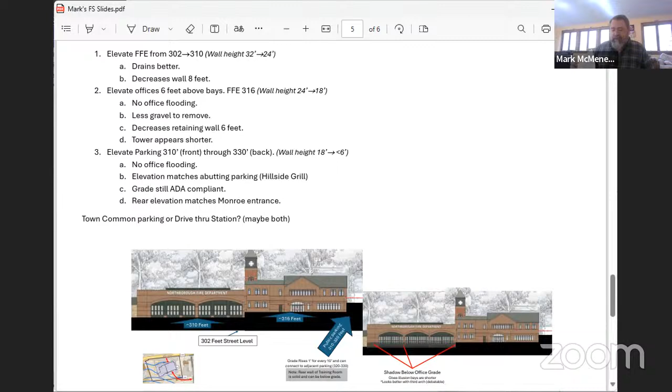Yeah, this is just the same thing, and I'm doing a Franken sketch here where I'm trying to flip the building. Really, the last slide is - let's go to the next slide because there's nothing new here. Is that the? That's all I have here.

Okay, so this is the massing slide. As the guidelines call out, larger buildings should incorporate architectural design tricks or whatever to try to make the building look smaller. This building being a public building and all, sometimes you don't want it to look smaller.

I think what you've got here actually does a pretty good job of looking bigger than it actually is, because all the height and the length is all visible from the street. So just for a what-if scenario, I did a thing where I basically took the back of the building and made it the front of the building, and went through the scorecard to see how it compares.

With this having the second level step back from the front, it really decreases the appearance of the size of the building. Having the elevations different between it, and you do the shadowing trick where you match the terrain of the higher side on the lower side, gives the optical illusion that the garage bays are actually shorter than they are.

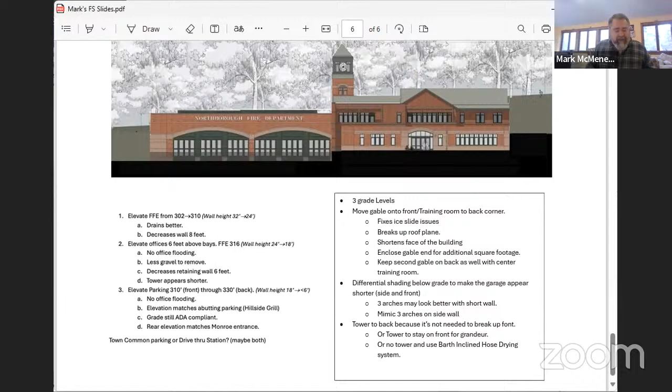So it's just kind of going through it. Part of these design ideas, to get rid of on this hypothetical scorecard that isn't going to be used on this project, there's a couple of negative things, things you lose points for. Say this was a point system, hypothetically you started with 20 points, you lose a point for anything, you come up with a final score of, let's say, 15 or something like that. We just pass it on to the next board. It doesn't, and it's used for comparison to other buildings.

The negative things that you have against you, of course, are really basic, and we would make a recommendation for variances to be approved. But the safety concerns would be the retaining wall. I think Bob Federico had mentioned about the snow sliding off the roof, where a gabled end there or stepping back that wall helps that. So it's just something we note. Flooding potential, it's there. I think an insurance company would point that out. I know they pointed it out on similar docs that I've been involved with.

You say the building massing, things like that. So actually, from my perspective, I'm trying to reason out why things are the way they are to help you get these things approved, not to hurt you. So I just, it's more for conversation.

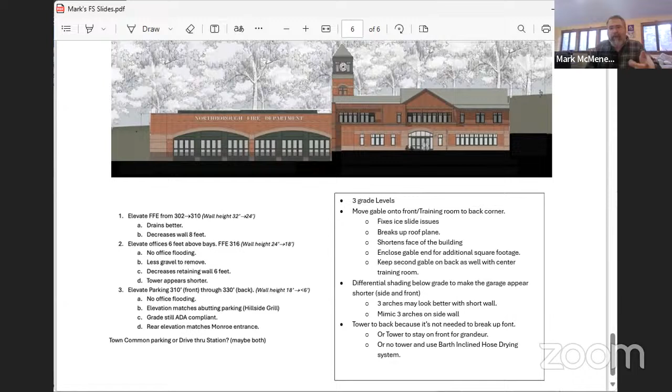Did you come back with what type of materials are in the banding? I know bricks are at the top part of the building, but then you show the banding at the bottom part of the building and the roof area. Amy, why don't you take down the slide so we're not looking at this Franken drawing? Sure, I was just looking at the building actually.

I was wondering if you had any more input on what type of materials. Yeah, I did mention it, I think, and we talked to the committee about it last night. We've had a number of meetings with masonry suppliers since we last met with you. We've looked at countless dozens and dozens of different options. We still haven't found the option that we want to recommend to the committee. We have additional meetings today to look at some new samples, and we're hoping to wrap that up soon so we can present a material palette to the building committee. And once that is presented to the building committee, we can bring that to you.

Okay, thanks. So around the apparatus bay doors, is that still metal or that might change? We're still looking at options. Okay, all right, all right.

So it does sound like there are a couple of things we still have left, to have you come back, but I'm wondering... oh, Bob has his hand up. Yep, thank you, Amy.

I want to go back to Mark's idea about potentially raising the apparatus bay floor elevation. I'm going to share a true story with you. I was on the building committee when we built the Grafton Fire Station almost 20 years ago. The designers came to us because it was next to a wetland. They wanted to raise the elevation of the floor by 4 feet.